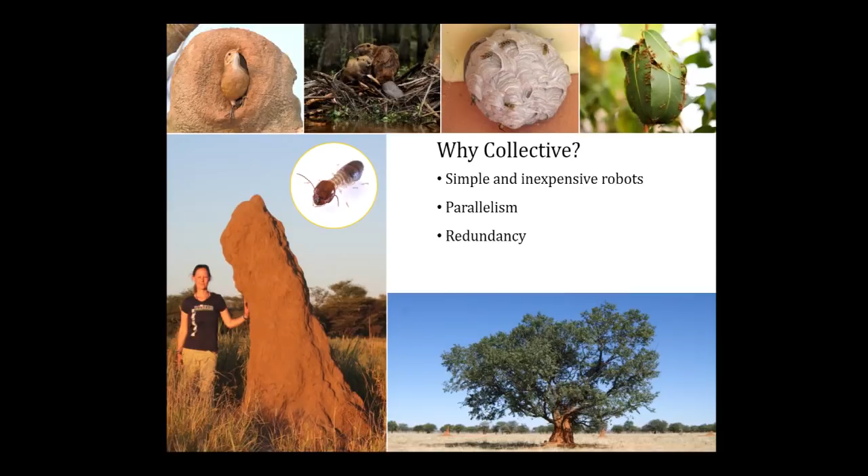So it's my dream to eventually create robot collectives that might work just as well under internal and external perturbations. To do that, we really need to focus on very simple, very robust, and very scalable hardware. So I'm a strong proponent of embodied intelligence, which is a means by which we optimize the hardware specifically for the task at hand in order to limit the need for complicated sensors and control.

If you think of a termite, it's very vulnerable on its own, has a soft, squishy body. It's a delicious treat for many other insects. It's completely blind. But as long as you place that termite as part of the collective and into the environment it's constructing for itself, it's remarkably robust.

So it's that sort of approach I like to take to robot collectives, and it's the reason why I really like this concept of automated construction, where we get to design not only the robots, but also the environment, the structure, and the building material that the robot operates in. So we get to optimize the two for each other and thereby create even simpler hardware.

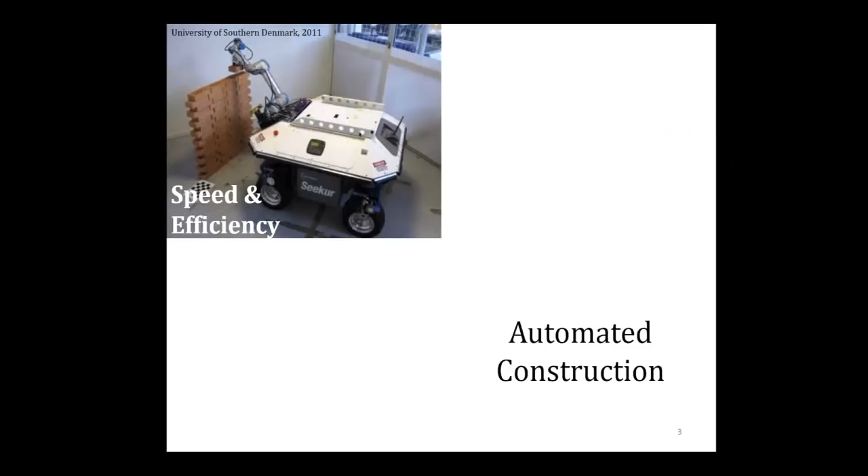Other than being a really good task with which to study robot collectives, automated construction also has the ability to improve speed and efficiency in construction, and even more so, to remove humans from hazardous environments. In 2014, more than 19 percent of all work-related injuries reported in the US were due to construction workers. On average, 2 people a day are fatally injured on US construction sites. That's a pretty sizable number.

I'm interested in enabling construction in settings that have been considered too dangerous for humans to work, like disaster areas, where you can imagine robots coming in to build supporting structures in the rubble, or extraterrestrial areas where you can imagine robots building temporary scaffolds within which humans can work safely later on.

Now, lots of people are working on robot collectives. I found a couple of cool examples here at UW. This here is work from Eric Klavins' lab with these robotic chemistry-inspired testbeds.

This is really cool work for 2D assembly, but these robots sort of lack the ability to interact with and modify the environment in the way that I'm looking for in my research.

These here are more along the lines of what I do. These are the swarm bots from EPFL. Every robot here has the ability to sense, think, and move on its own, and they have this little gripper with which to grab onto other robots if they want to reinforce or encounter a bigger obstacle.

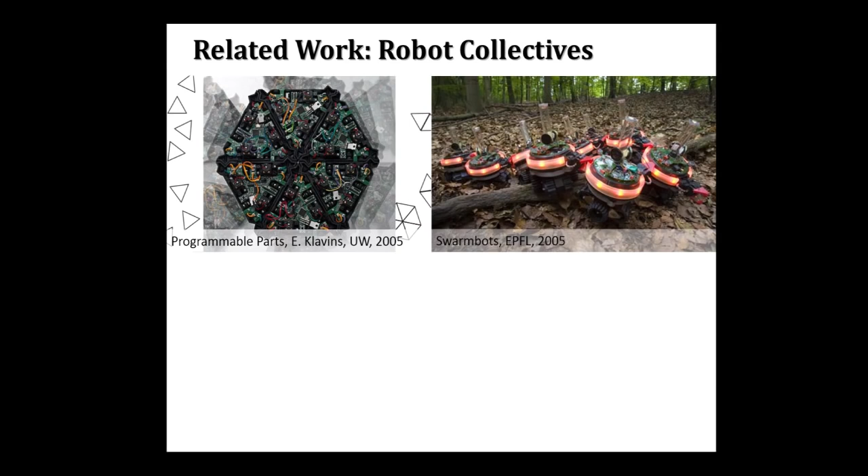Typically, hardware like this has issues, right? It's rather complicated, it's prone to error, it's pretty expensive, and so you don't have very scalable systems. Up until 2014, no systems had really made it beyond a few tens of robots applied to very simple demonstrations.

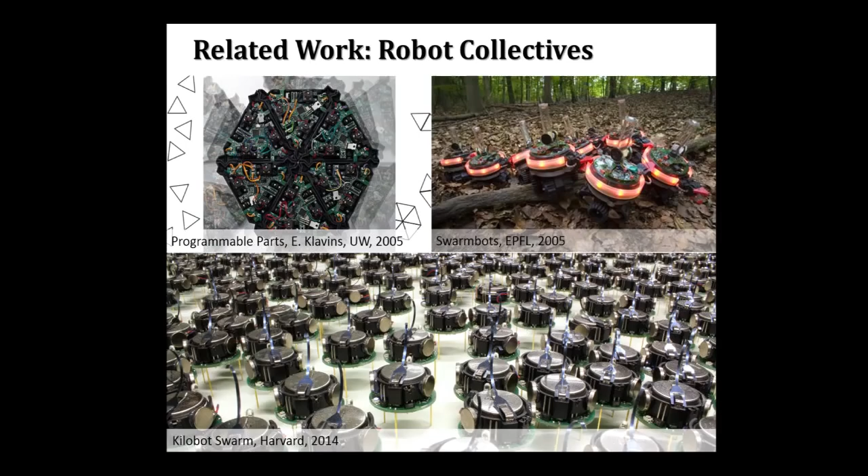Then in 2014, Mike Rubenstein from my old lab came out with his work on the swarm. This is a kilobot swarm. There are 1,024 robots. Again, every robot has the ability to sense, think, and move on its own, and they can communicate locally.

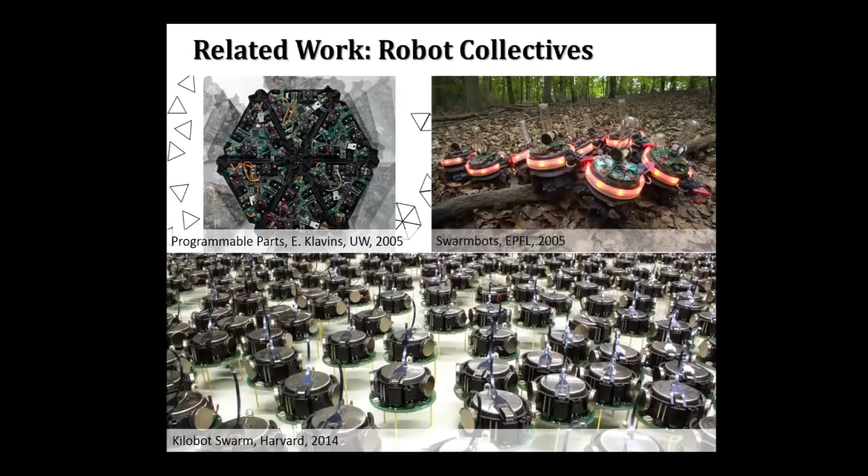This is really cool hardware, because it suddenly allows us to test all of our swarm intelligence, all of our swarm algorithms out on real hardware with real implementation issues. But again, notice how they're only working on a perfectly smooth whiteboard setting in a highly controlled laboratory environment.

And don't be fooled by this picture, these are 2D. So there's still a pretty big gap from where we are today to a final system that might actually work in a cluttered environment.

If we look at collective construction, it gets a bit more complicated, because here we're looking for robots that can not only manipulate material, typically on the scale of the robot, but also maneuver on top of that material too. Those two challenges, climbing and manipulation, are individually complicated, and putting them together in practice is proving quite hard.

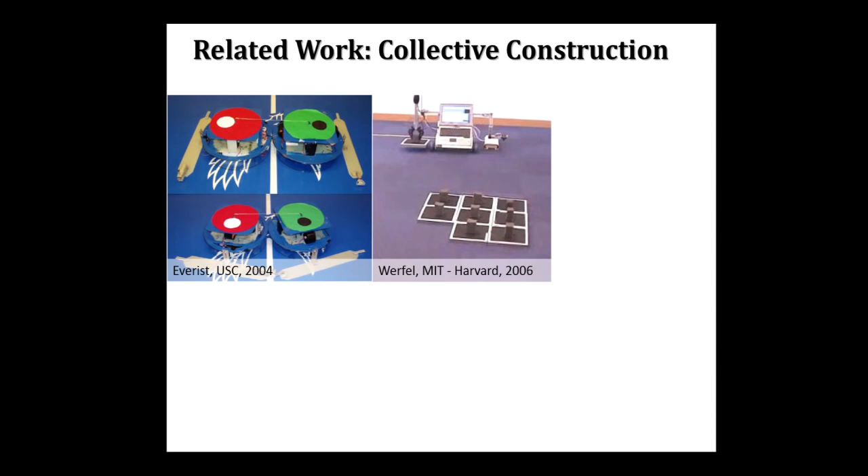There are many examples in 2 dimensions. Here's just a few: robots docking trusses on an air hockey table, done at USC. This here is work by an old colleague, Justin Werfel, where he had these very simple robots placing bricks in predefined patterns. Much less work has translated to 3 dimensions.

Again, just a few examples. These are really the pioneers of the field, Terada and Murata, who had these simple arms moving passive bricks around in a structure. And this here is work I did at the University of Southern Denmark in my master's thesis, where I had smart but passive bricks guide active but dumb robots on how to build a structure.

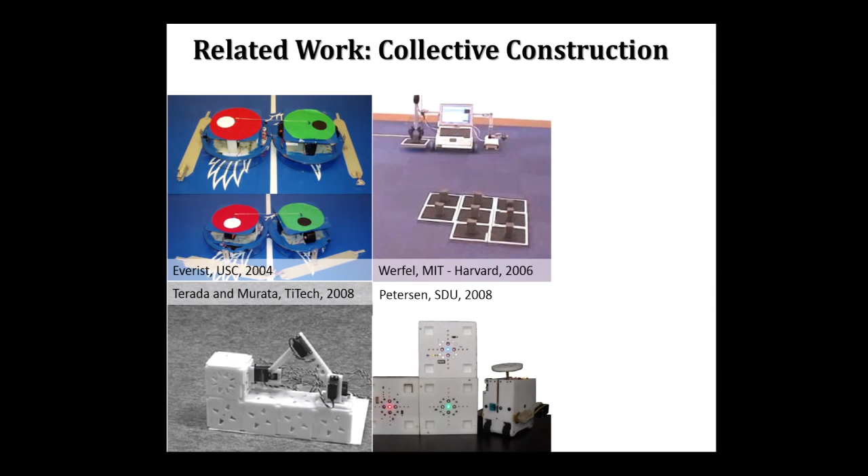So again, really cool examples of which way we're going, but there's kind of a lack of proper implementation, right? Still very advanced hardware, it's too expensive, it's prone to error. You never see more than 1 or 2 robots working together at any one time, and the structures they're creating are pretty small compared to the size of the robots.

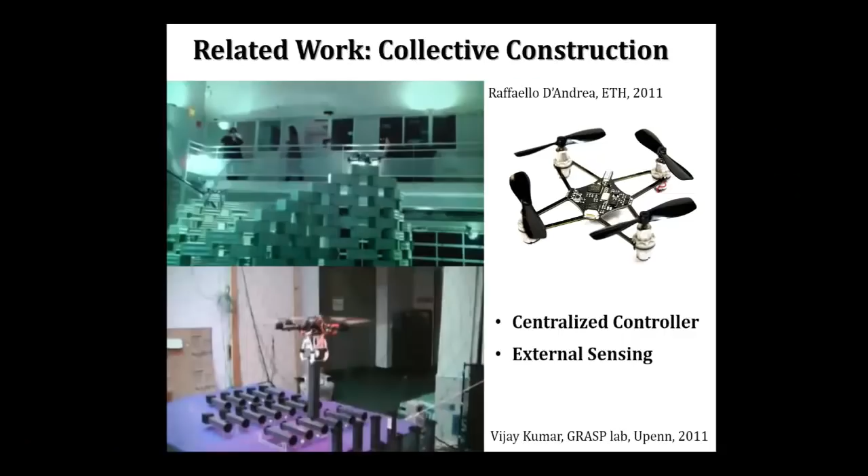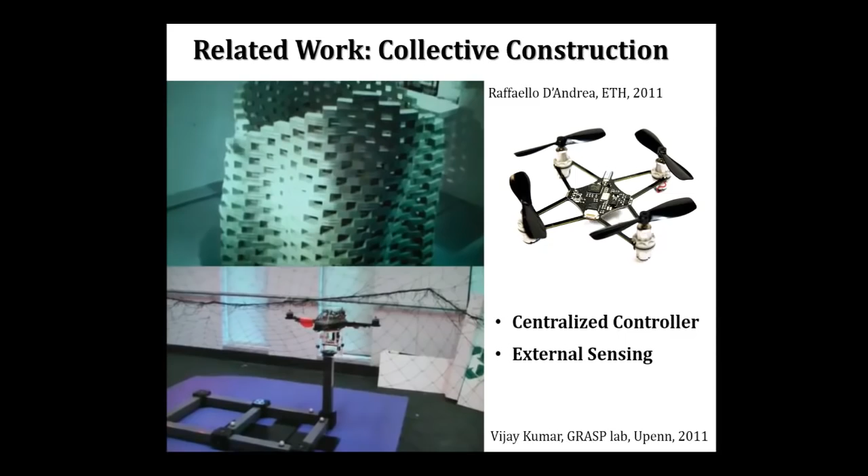So there are a couple of exceptions. The most notable is the work with quadrotors, both at ETH and UPenn. Let me just point out here that these work with a centralized controller, and they have external sensing, basically a Vicon system that tells them exactly where all the material and all the robots are at all times. So a very different approach to the problem than what I'm going to be presenting for you today.

Now, where there's been relatively little work in hardware, there's been quite a lot of work in algorithms, from gradient descent algorithms for how to efficiently guide workload around on a truss structure, to work in weightless and semi-weightless environments with homogeneous and heterogeneous societies.

And these are really great, right? Because they show us that we can achieve a wide range of structures with these multi-agent systems, ranging from systems that have completely centralized control or lots of communication between agents, to systems that have completely decentralized control or no communication between agents. Again, unfortunately, common for all of them is that they tend to underestimate how hard it is in real life to actually make hardware that works reliably doing all of these rather complicated tasks.

So in summary, we have these two bodies of literature that sparsely overlap. There's a pretty big gap between the abstract agents and what's physically realizable, especially in this type of cluttered construction environment where communication is likely to be unreliable, where any memory you have of the structure you're building is likely to be outdated very fast because a lot of robots are updating the same structure at once.

Finally, we need to focus much more on simple, more robust, more scalable hardware, and that really hasn't been done in the past. Also, I think it's important that we focus not just on making systems that are free of error—it's pretty much impossible to do. I think it's important that we focus on making systems that can tolerate errors that are bound to happen, perceive them, and recover from them before they become a problem to the bigger collective.

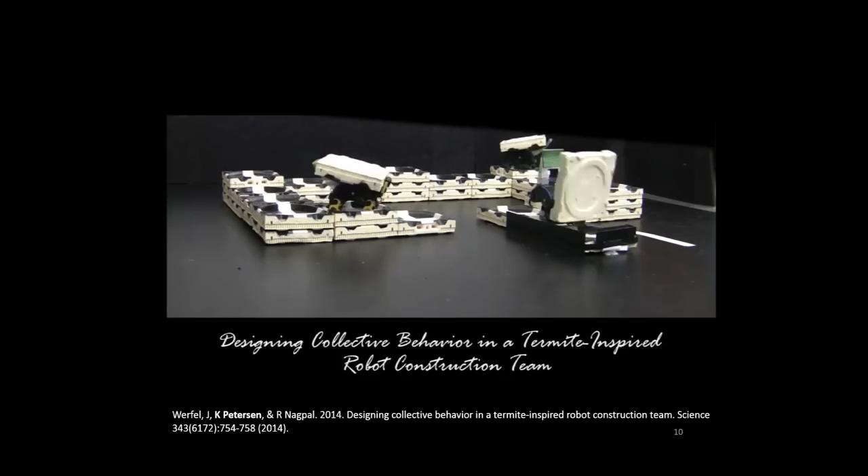So we made this algorithmic framework and a full physical implementation of these systems for collective construction of user-specified three-dimensional structures.

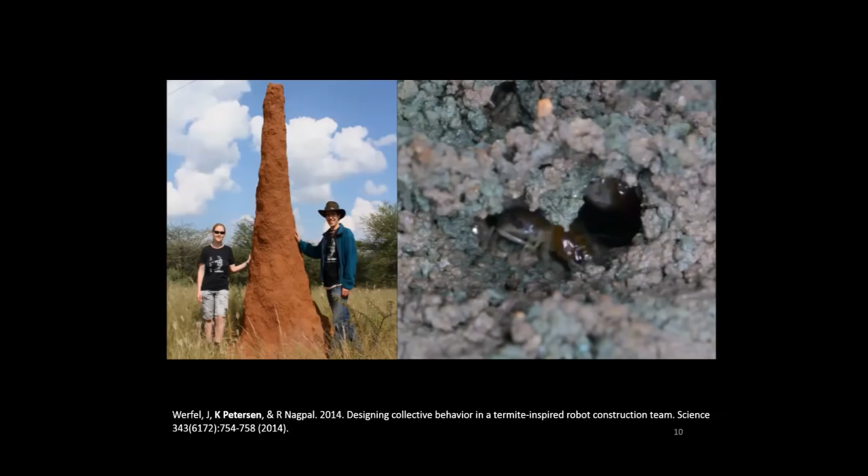Our work was inspired by these African species of termites, millions of which come together to build these amazing mounds out of soil. The termites are able to achieve a high degree of parallelism by passing information through the environment.

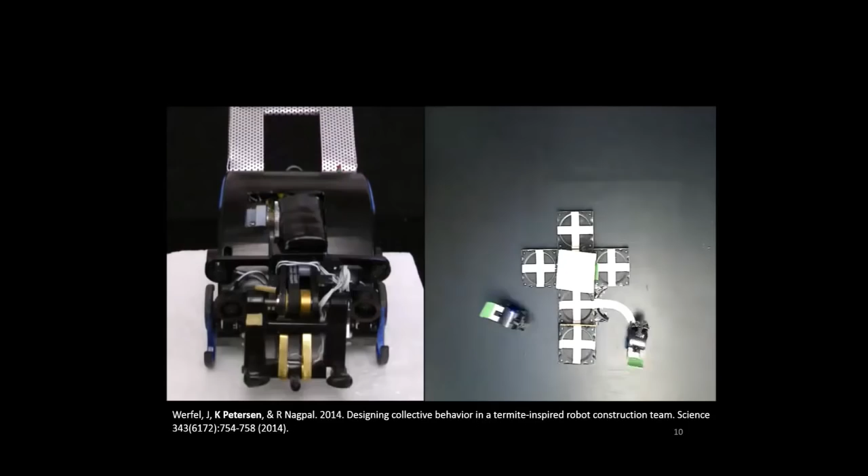Now, like the termites, our robots work in a completely decentralized fashion. They have to climb on the structure they're creating. They can only sense their local environments. But through the strong focus on error-tolerant control and co-design, embodied intelligence, we were able to achieve a very reliable system.

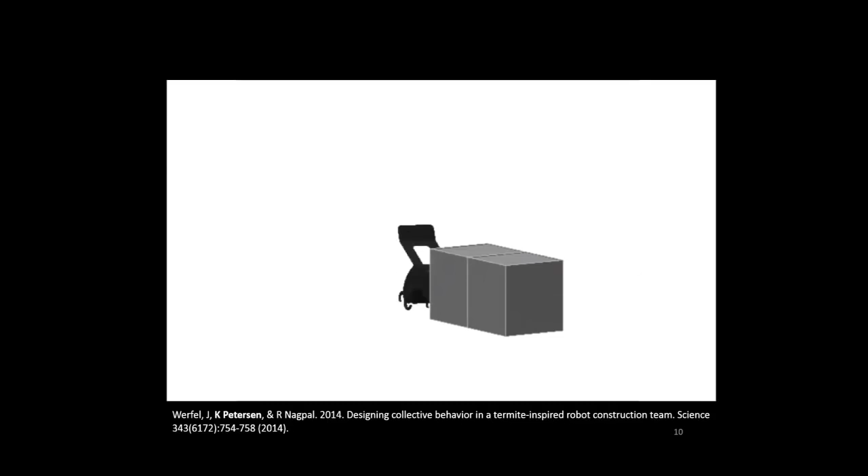So it works by taking this blueprint of the structure, some user input, passing it through an offline compiling step to generate a set of traffic patterns, which we then give to an arbitrary number of robots. The robots then use that set of traffic patterns along with an internal rule set, which is independent of the structure they're creating, to create these user-specified structures with provable guarantees.

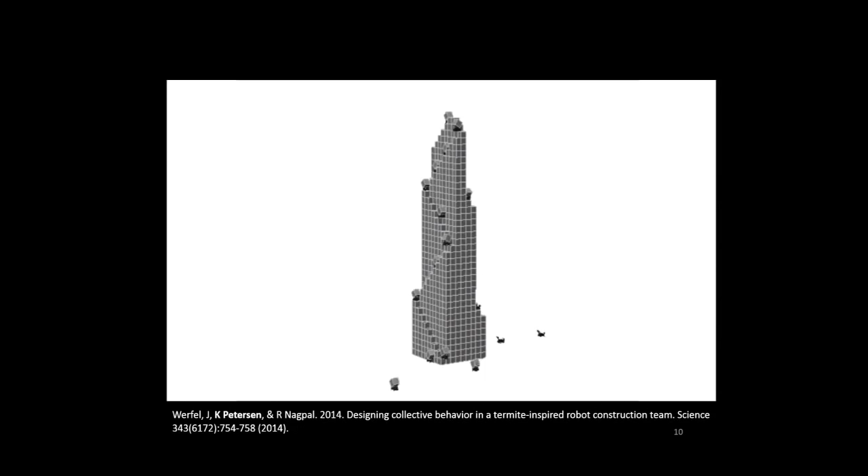Now, robots can utilize many different paths through the structure, meaning the structure can emerge in many different ways, but always with this final fixed outcome.

And the cool thing about the algorithms is really that robots have no memory of the structure they're building, so I can come in and interfere with the progress of the robot, and it doesn't care. It simply keeps patrolling the structure, doing what it needs doing whenever it sees something is wrong. And this could be me or another robot, it doesn't matter.

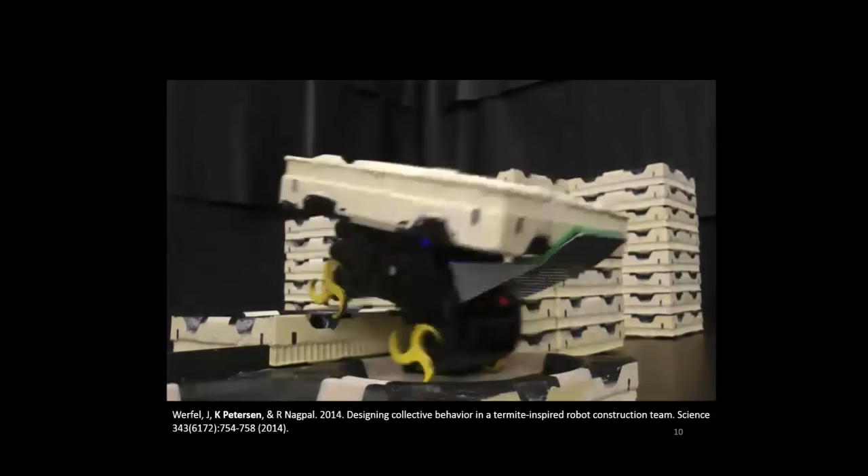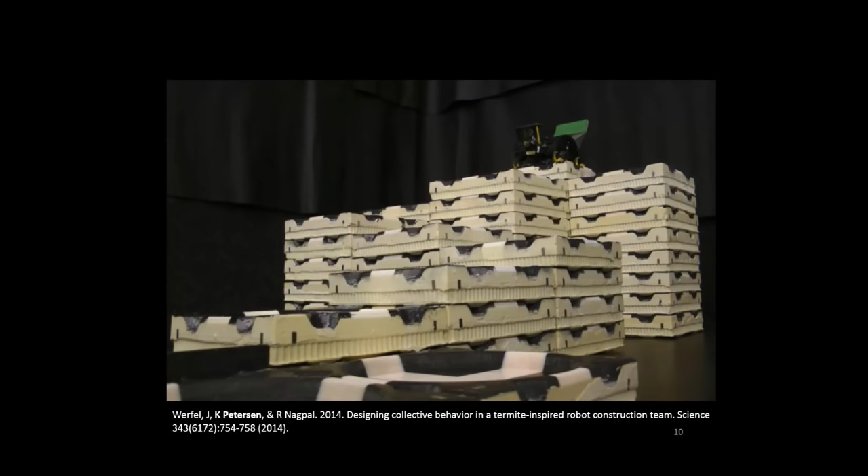So with this work, we hope to have shown how we can achieve rather complicated behaviors with very simple, independent, self-contained robots. And of course, the idea is you build on that in the future to achieve even more complicated things. All right, so I promised to tell you how this works—the framework first.

So for that, we have to go back to the termites. As I said, you have millions of them in nests underneath these big mounds. And the mounds are much more than just a pile of dirt. They're an intricate series of channels and chambers that we actually have found work as an artificial lung for the nest site underneath. It's a highly complicated structure. The termites, as I said, work in a decentralized fashion.

They're able to achieve this high degree of parallelism by passing information through the environment in a process called stigmergy. They're relatively simple compared to the structure they're creating. They have to climb on it. They certainly don't have the mental capacity to perceive the state of the entire colony. They're localized, meaning they're, in fact, completely blind, so they have to only sense their local environment. And although the system may look messy at times, it is remarkably robust and error tolerant.

And through their low-level inputs, they're always able to produce these guaranteed high-level outcomes. So we've taken these ideas and implemented them into a bare minimum robotic system that can still achieve a wide range of structures. What I'm going to show you today is an algorithm that can build user-specified three-dimensional structures with many agents, as long as those agents comply with a set of fairly simple constraints.

We need robots to be able to perceive locally, meaning the brick at which they're standing and if other robots are nearby. They need to be able to perform limited brick manipulation, meaning they should be able to place a brick directly in front of themselves and never directly in between two other bricks, because that would be hard to achieve. They should be able to add bricks to the structure but not remove them. They should be able to climb up one brick at a time but not up straight walls. And they should be able to avoid other robots but not have to communicate with them.

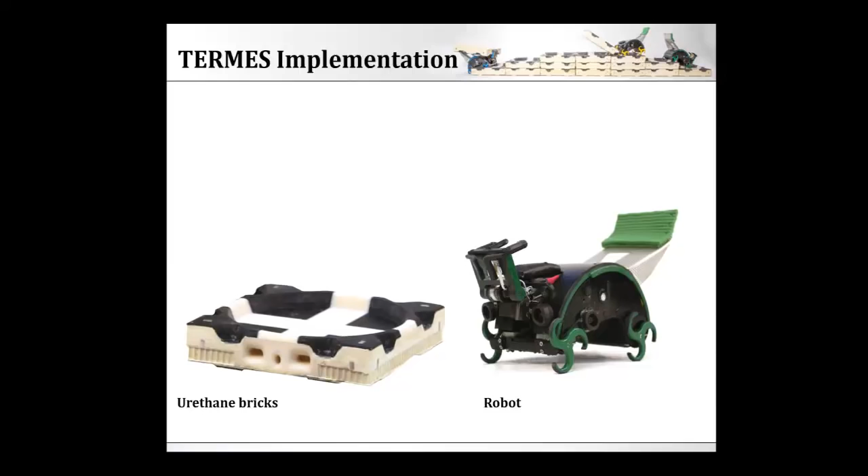So here are the robots I designed to go along with that system, robots and bricks. The bricks are made of urethane, which is a light, cheap, sturdy material. They're about the size of a normal brick, and they weigh about a quarter of the robot. The robot is slightly smaller than a brick, so it fits on top of a one-brick wide wall.

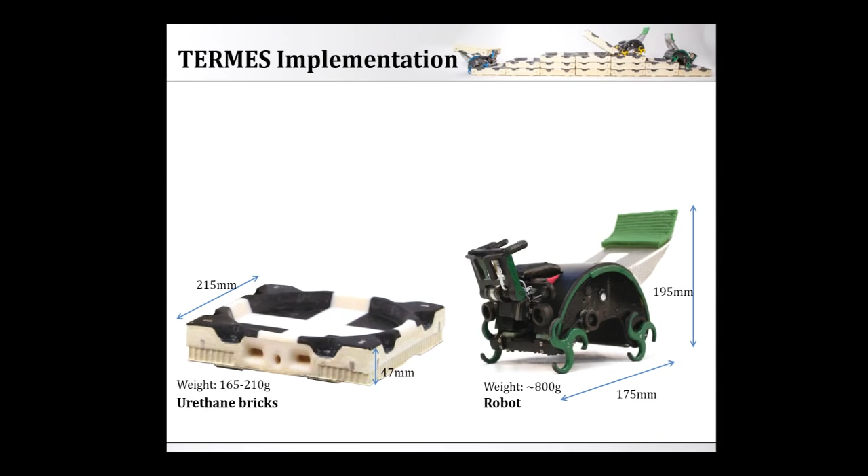And when I designed these things, I really had a strong focus on simplicity, robustness, and reliability through two key features. The first is co-design, meaning that for every new challenge, you take a step back and ask where can we solve that challenge in the simplest possible way? By changing the hardware of the robots, by adding sensors, by changing the shape of the bricks, the structure, the embedded hardware or the software or even the governing algorithms. Nothing is off limits, and that really allowed me to make a very simple system.

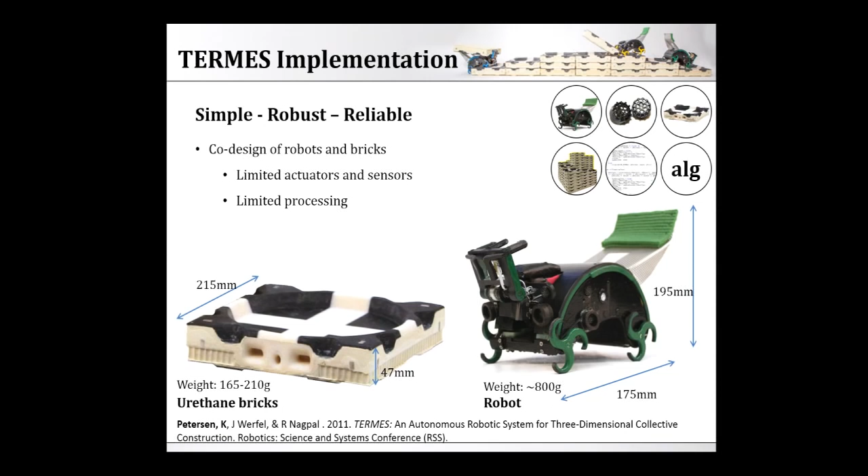In this case, the robot has 3 actuators and 4 types of very simple sensors, and all of the processing is done by simple finite state machines. As I said before, I wasn't focusing here on making a robot that never committed errors. I knew they were going to happen. I focused on making a robot that could continuously evaluate its own process and fix any errors that were bound to happen.

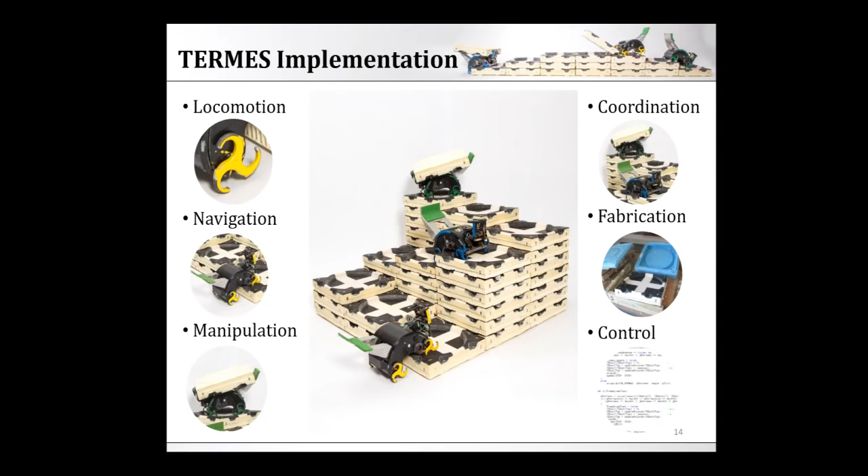So here are the challenges we took on when we designed the system: locomotion, navigation, manipulation, coordination, fabrication, and control. I'll just briefly touch on each of them. The first big challenge was that of locomotion, both on level ground and climbing with simple control.

So as you can see, we focused our efforts on Whegs. Whegs are a combination of wheels and legs, a term coined by Roger Quinn at Case Western. They're really great for fast locomotion over unstructured environments with very simple control, which is kind of what we're trying to achieve too. We want robots that can climb very tall bricks, because the taller a robot can climb, the more material you can add every time, and so the faster you can complete a structure of a given size.

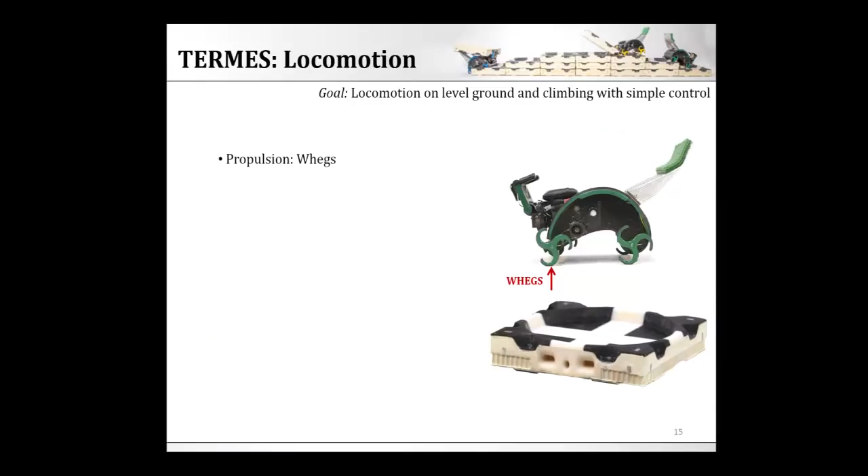We want more than just easy control. We also want very accurate control when the robot is walking on top of a structure, so to avoid falling off that structure. To do that, I added these passive mechanical features in the bricks to help the robots. I added notches on the side of the brick that are chamfered inward, so as the robot is climbing it automatically aligns. There are little hooks on the rear Whegs that help the robot gain traction just at the right time.

Whegs are great for climbing, but they're pretty poor for turning because the radius of the Wheg changes over the turn of a rotation. So to improve that, we curved the spokes of the Whegs. I added this indentation bowl, so now, unless the robot is actively trying to climb out, it will stay in that bowl and keep turning.

Very simple features. Because we had all these indented features on the top, we added inverted features on the bottom and magnets that help them stack and align, almost like Legos. A rather complicated challenge solved in a very simple way by optimizing all parts of the system for each other.

Not to go into too much detail on the hardware, but this is a differentially steered robot. There's a little motor that sits down here that drives the front and rear wheels through a timing belt. There are a bunch of considerations behind how to optimally place the center of mass so it can climb up and down bricks while carrying and not carrying a brick.

The next big challenge is navigation, both on the structure, where the robot has to keep track of its location with respect to the seed configuration placed down here. To do that, I added visual markers on the bricks, these black and white patterns.

Six IR sensors underneath the robot, imagine a very coarse black and white six-pixel camera. Together, these are enough to perform accurate pattern recognition as you walk across the structure. I also added a one-axis accelerometer so the robots know if they're climbing or not, so they can recognize the structure they're moving over.

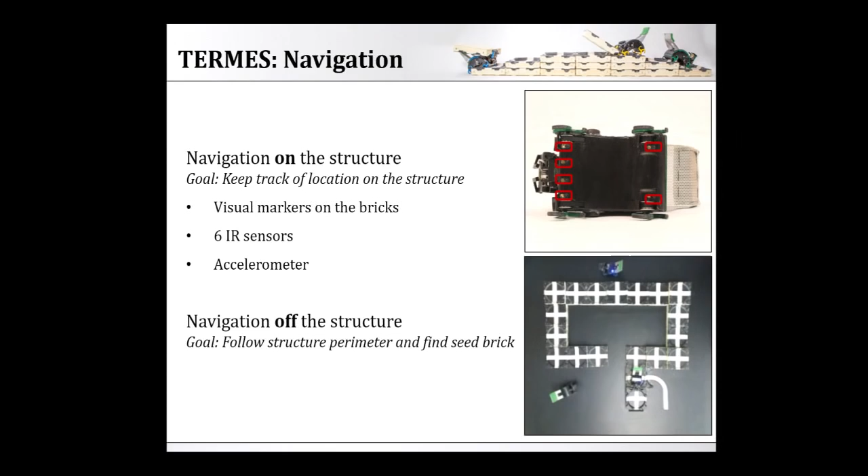We also need robots to navigate off the structure, and the goal is to follow the perimeter back around until they find the seed brick again. I added four ultrasound transceivers in the front and side of the robot so it can do wall following.

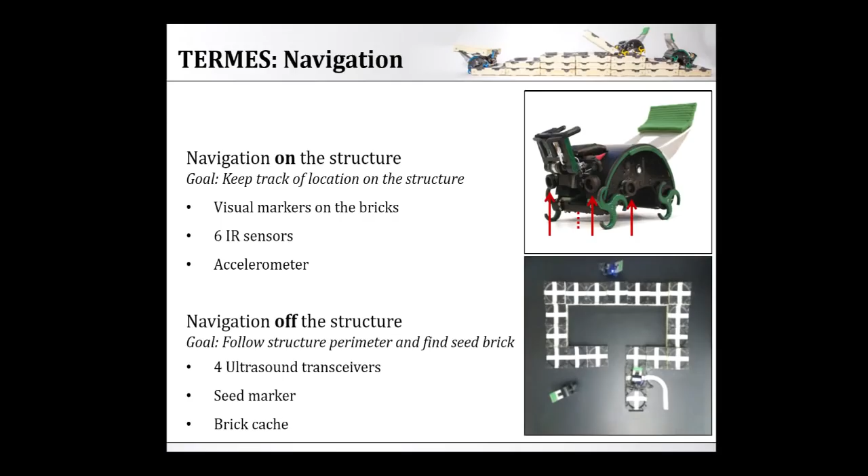I added a seed marker, a white line on a black floor. Rather than having robots go off into unmarked territory to find new material, which has caused trouble in past projects, I just added a brick cache at the beginning of the structure. Now all robots have to do is navigate relative to the structure, making them much simpler than they would have been otherwise. Again, a complicated challenge solved in a very simple way.

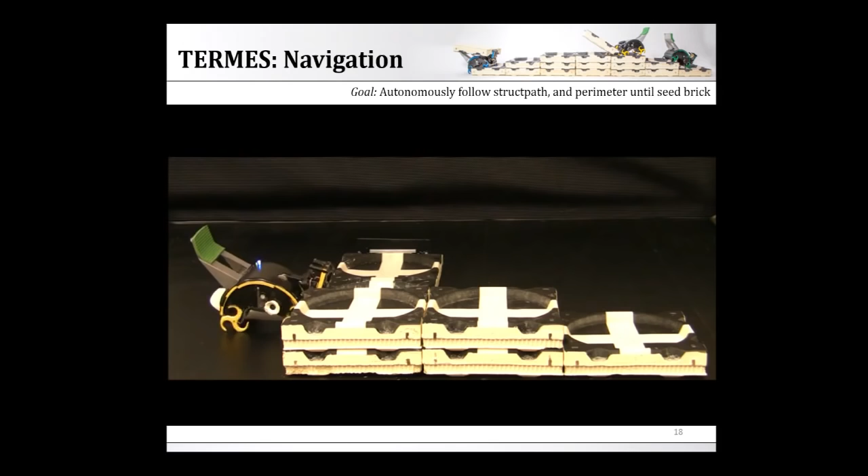Here you see this robot performing wall following, not perfectly, but through this iterative process it eventually gets the job done. At some point the robot picks up the white line on the floor and starts following it with the IR sensors. When the accelerometer detects that the robot is climbing, it knows it's on its way up that first seed brick, and it starts following the path I've given it through the structure.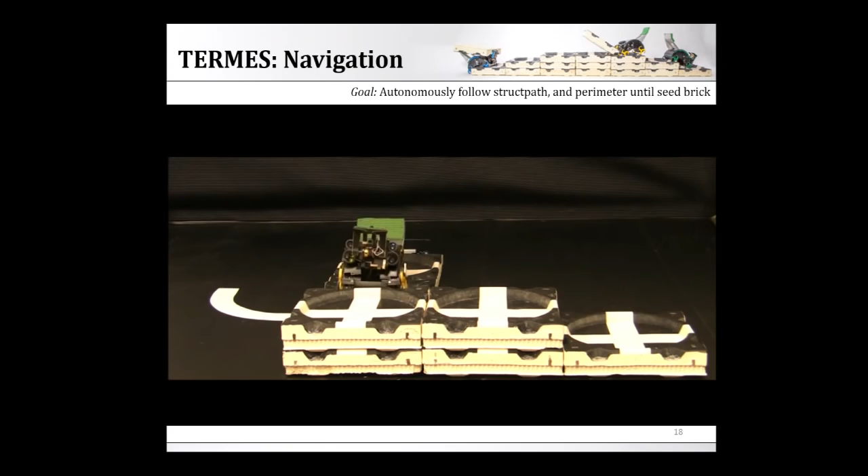Notice how the robot's definitely not perfect—it slips while climbing, it misaligns, it almost fell off the structure here—but it's continuously reevaluating itself and fixing all these small problems before they become bigger problems. So it's very reliable in the end.

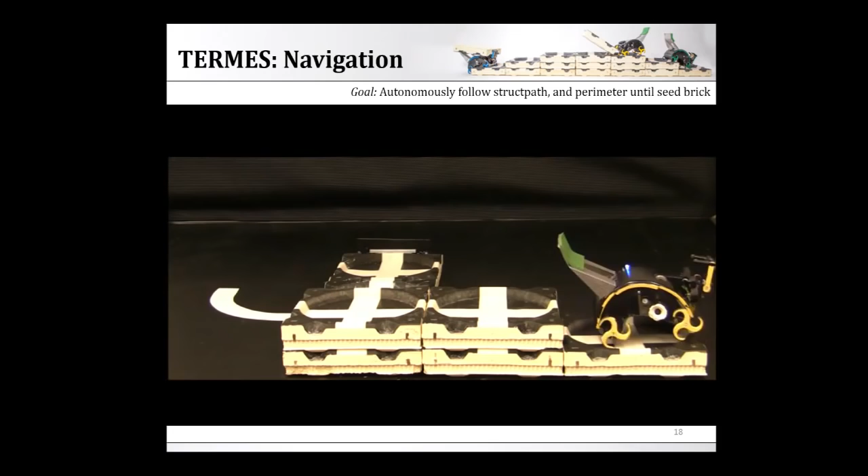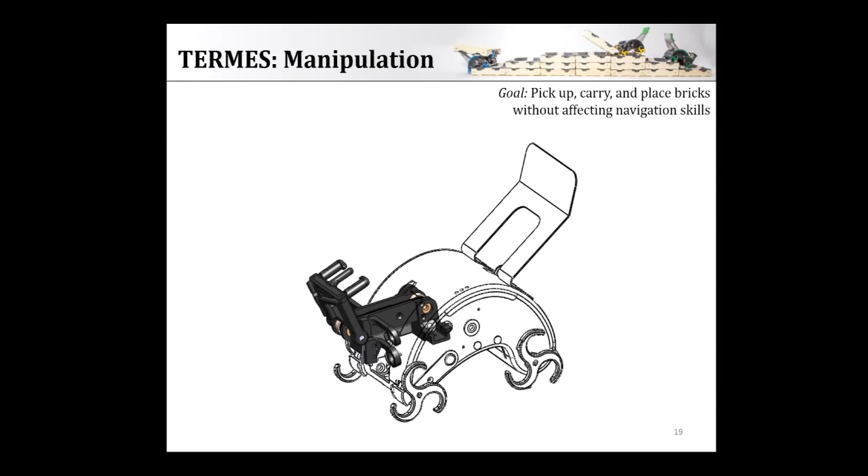We also need manipulation. For that, I added this fixed arm that always protrudes from the robot. There's a little motor down here that can drive this claw up and down. On the tip of the claw there are three prongs: the center prong is fixed for stability, but the two outer prongs are forced inwards by torsion springs.

I can force them open by pressing on the back, or I can lower the entire claw, and this wall down here will automatically force them open for me. That means it's really easy to release or grasp a brick, but as soon as I bring the claw back up, they snap back into place and hold the brick securely.

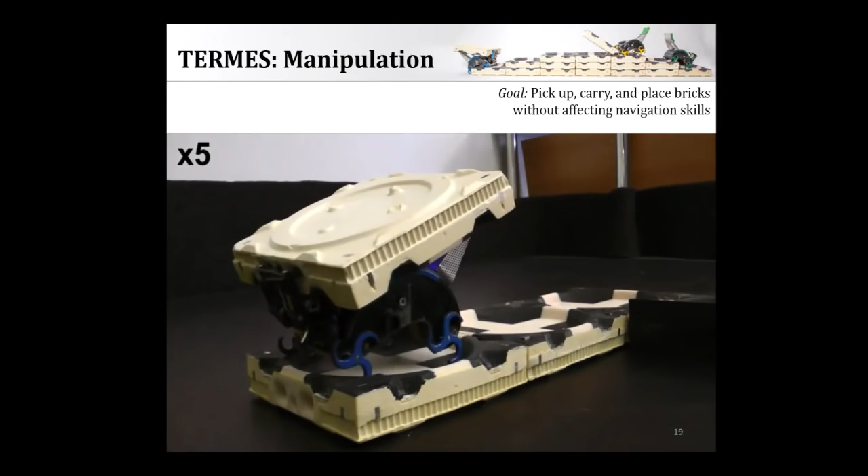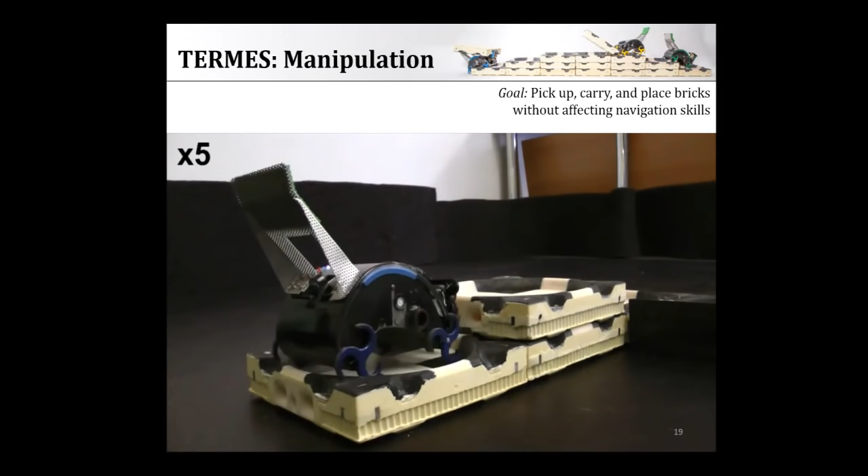I filleted the handle of the brick to make it really easy for the robot to dock with, and I added tactile sensing in the front of the claw—push buttons—to let the robot know if it has a brick in possession or not. Again, a complicated challenge solved in a very simple way through this focus on embodied intelligence. All the robot has to do is lower and raise the claw, and the rest happens automatically in hardware.

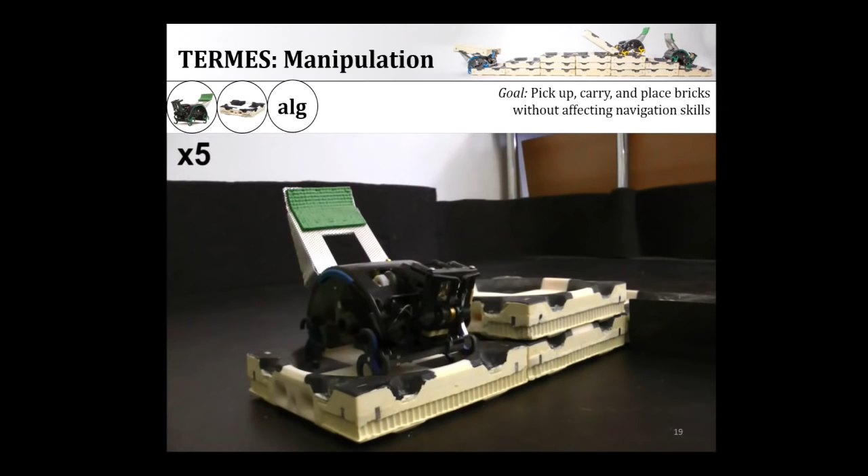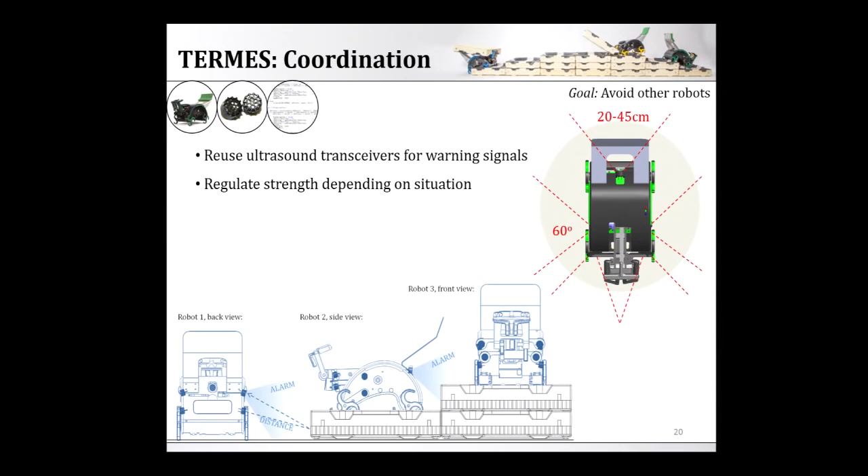All right, we need many robots to work on the same structure at once. They don't have to work together in this case, they just have to avoid each other. I send out a low amplitude ultrasound signal for that to happen, so another robot that sees that basically stays put until it's gone. I regulate the strength of that warning signal depending on the situation. So for instance, a robot which is about to place a brick needs a bigger safety perimeter than one that's just circling the structure.

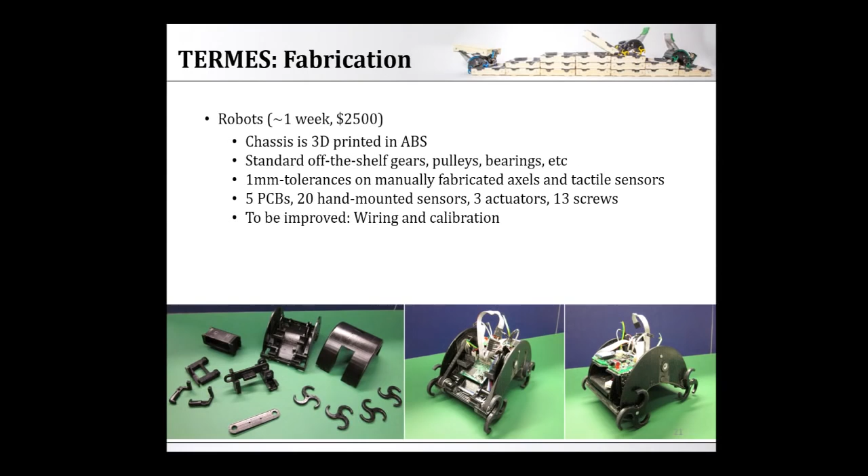Not to go into too much detail on fabrication, but I do want to point it out because it's incredibly important in this kind of iterative process where you're continuously updating both software and hardware at the same time. So right now I can redo a robot in about a week. That's from starting the 3D printer to ending calibration of all the sensors. Not a pleasant week, but I can do it. Right now it's pretty expensive, but that's because we're 3D printing the entire chassis. This you could optimize in the future if you wanted to.

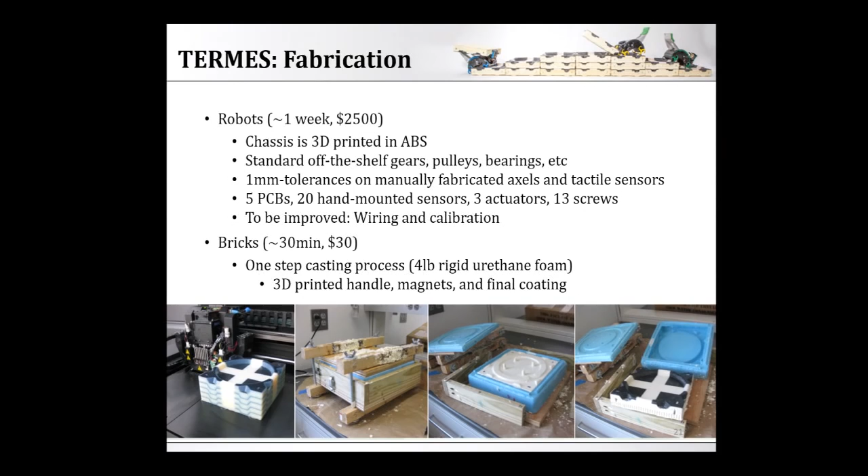Bricks are actually done in this very nice one-step casting process that I'm happy to talk more about later on, but you can do those very, very fast. And I guess I'm bringing up this slide because I want to say during my thesis I had to do 80 bricks and 9 different robots, and so it was very important to have this strong focus on very easy fabrication.

All right. Final piece of the puzzle is the embedded software that goes on those robots. And of course, the goal here is to enable the robots to autonomously build structures with high reliability, but it's also to create a software architecture where you can easily swap in and out different subroutines as the hardware is updated. So I created this hierarchical software architecture that has an algorithmic layer that runs sequentially, a behavioral layer that runs on inputs from either other layer, and a hardware interface layer that runs on interrupts from sensors or timers.

So the algorithmic layer obviously holds the algorithms and some higher level subroutines. The behavioral layer holds the more intricate subroutines like align on top of a brick or turn on top of a brick. And then all of these make use of these hardware interface routines that directly set the speed of the actuators or read in from sensors and so on.

So of course, it's important to remember that behind each of these settings, there's a longer set of code that ensures that each of these tasks is executed reliably before the next commences. But this really was a nice, clean software architecture. I could easily switch out different routines. I could even translate them between the different levels.

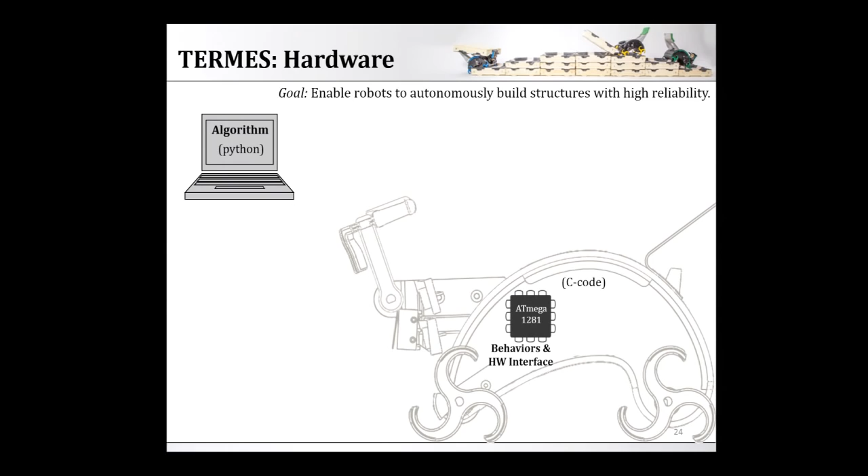And in the end, I actually ended up doing the algorithm on a separate computer that was written in Python, just for ease of debugging. I had the 2 lower level behaviors on an Atmega 1281 that was written in C. Those 2 communicate via Bluetooth. And then I have a separate processor taking care of all the ultrasound related circuitry just because it was rather time consuming.

All right. So here you see all parts of that system working together. In this case, I asked the robot to build me this little 10-brick staircase, which is more than 18 times the volume of the robot. That means carrying out 106 instructions correctly in a row.

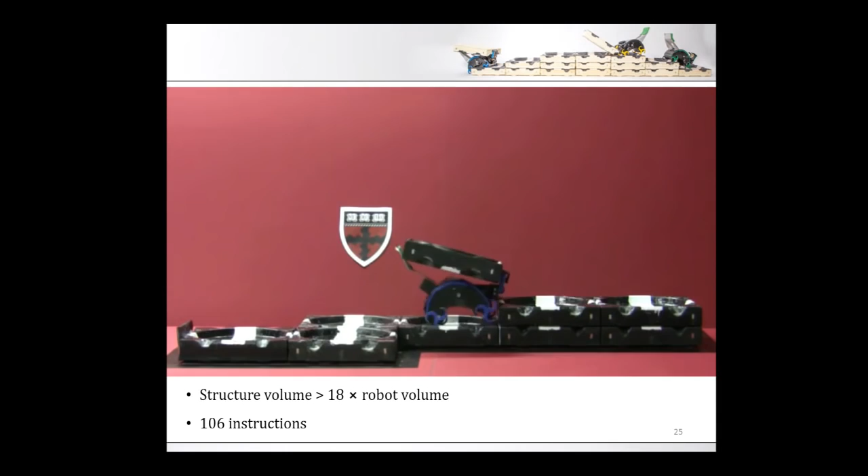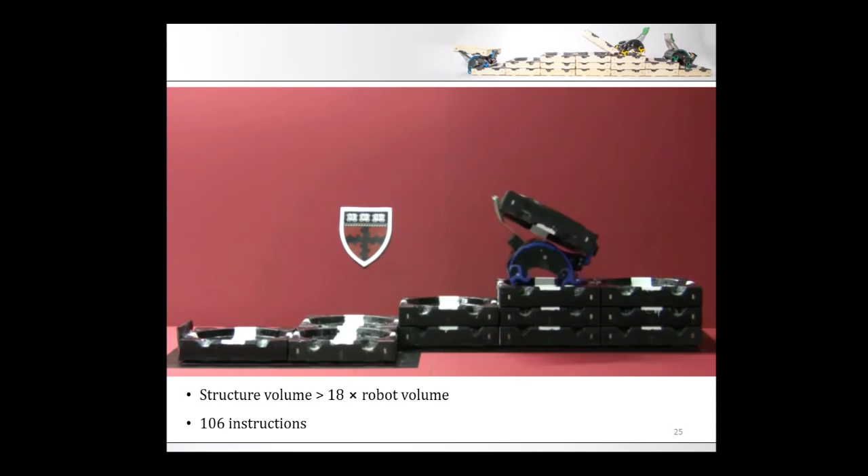So an instruction can be something like move from one brick to the next, or turn on top of a brick, or pick up a brick, or place a brick. So again, very clear that we have to have a very strong focus on error-tolerant control and very robust, reliable hardware.

All right. So I promised to tell you about the algorithms. Again, a high-level overview. We take the user input, which is a blueprint of the structure. We pass it through this offline compiler step to generate a set of traffic patterns. We call the output of that struct path compiler a struct path. It's basically a 2D projection of the structure that you want to create with a number at each site specifying the height of the stack of bricks at that site, and an arrow at each edge specifying which way robots can travel through the structure.

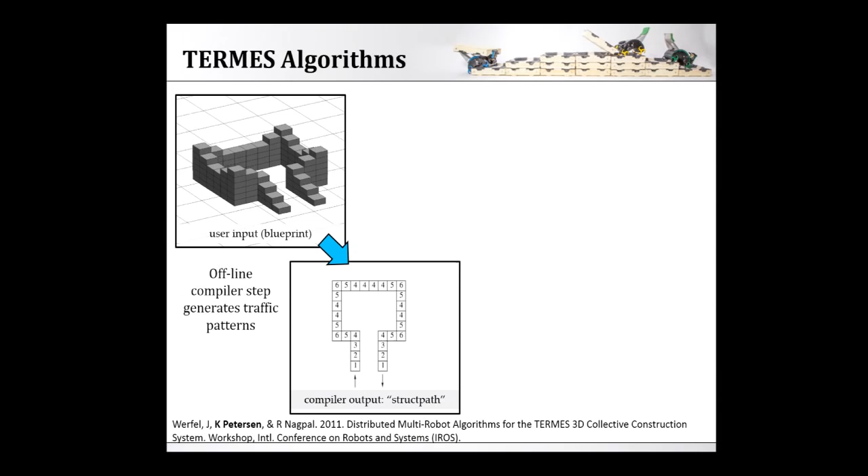Then we give that struct path to an arbitrary number of robots along with an internal rule set, and we allow them to perform decentralized construction. So if we take a step back, there are 2 key features to this algorithm. The first is this struct path compiler, which you can give any new structure, and it will automatically tell you whether or not that structure is doable. And if it's doable, it'll give you some traffic pattern that guides the flow of robots over the structure. And then there's this internal rule set, which is independent of the structure and just tied to the mechanical abilities of the robots.

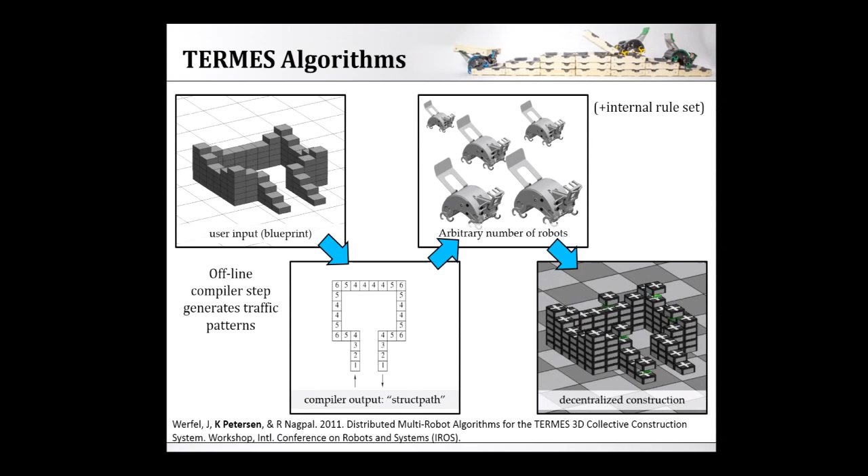Together these two guide the robots over the structure and organize their building activity so that the local information available to the robots is enough to guarantee completion of the correct structure. Without those, you might end up in bad situations where something created a cliff that other robots couldn't climb over, or created a gap in the structure that you'll have to fill in later, which will be hard. We don't allow either of those to happen.

But as I said, we also need this agent rule set to ensure everything is done correctly. A simple example first: this is for a linear path structure. The robots will get a brick, go to and follow the struct path. If the struct path specified a brick at the site they just visited—remember robots can only see the brick they're standing on, so they have to pass over the site they're inspecting before deciding to turn around and place a brick—and it's safe to attach that brick, then they add it. If at any point they see another robot, they maintain their distance.

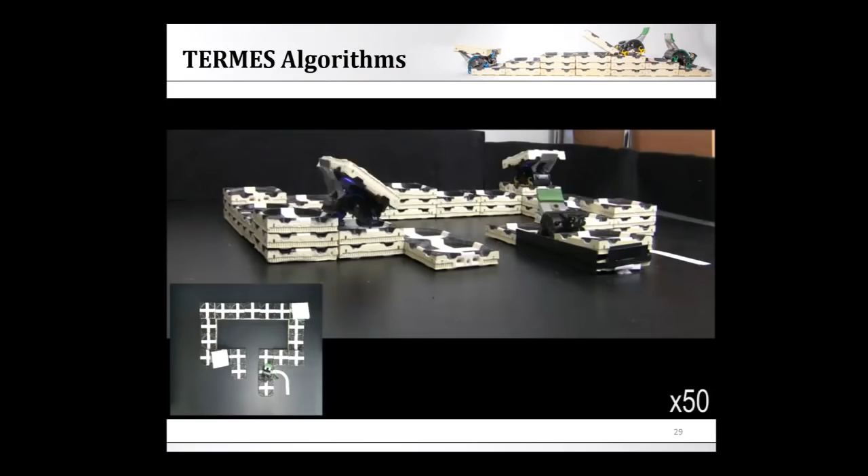So we can do a wide range of structures with this system: linear, branching, solid structures. Of course, there are some limitations. We can't do overhangs, we can't do narrow corridors. There has to be an entry and at least one exit point on the exterior boundary of the structure, and there has to be a traversable path for the structure.

But I can show you some pretty cool simulations where we have a lot of robots building a lot of different structures—in this case, a very tall tower. Again, we're specifying the high-level output through these low-level rules. This is a system that doesn't need an overhead controller to work. We don't need robots to maintain global awareness or even be synchronized. Every robot is easy to add and remove from the system.

Completely decentralized control in this case, and highly simple agents that are actually physically realizable. If you paid attention, you'll notice I was still telling you about perfect agents, and in the beginning of my talk I told you that's not possible. Yes, that's true—we allowed ourselves to do this in this first version of the system because I managed to produce such a reliable set of hardware. But in the future, you would definitely want to focus on more error tolerance at the algorithmic level as well.

Quick summary: I showed you the algorithmic framework with the compiler and the agent rule set. I showed you at most three robots and 50 bricks working at any one time. We had one robot autonomously build a structure 18 times the volume of the robot.

We've had 3 robots autonomously build structures 14 times the volume of 1 robot. We've done several performance tests showing that the number of failures the robots can't correct, compared to the number of successful instructions carried out, is very small. So we're happy with the system, but we're still not creating human-scale structures.

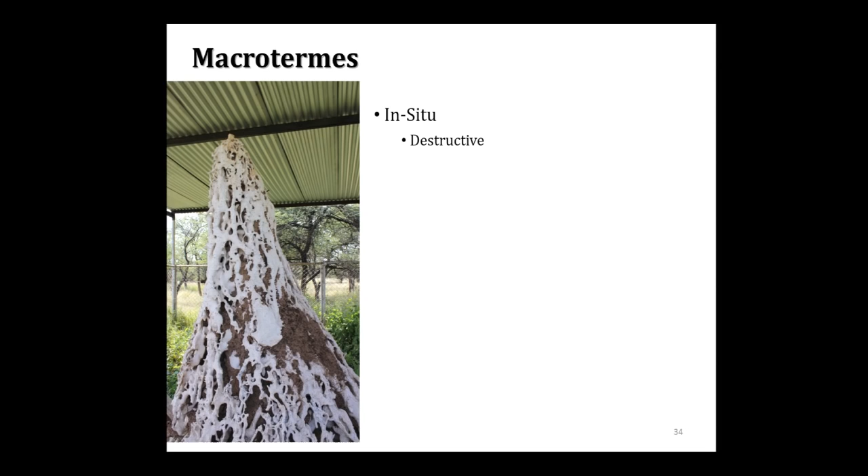What's more commonly done is you take termites out of the mound and place them into experimental petri dishes with soil to see what happens. This is problematic on its own, because termite behavior tends to deteriorate the longer they're away from the colony—lasting only a couple of hours or at most a day. But you can get them to construct some things.

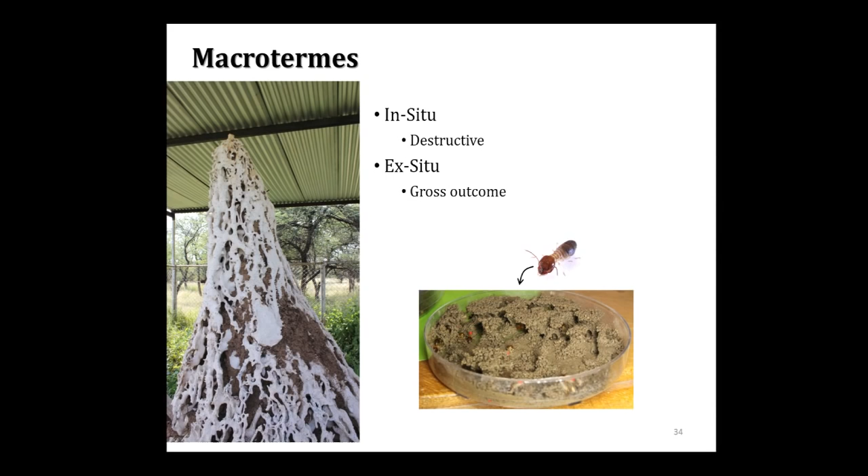Of the experiments directly interested in construction, only the gross outcome has been recorded—meaning you leave termites in there for a couple of hours, they build something, and you come back to see what they did. But you have no idea what the individual termite did or why it decided to do so.

Although there have been recent great advances in trackers for ants, bees, and wasps, they hadn't really made it to termites, because termites are so much harder to work with. So all the observations done are manual, which naturally leads to a very sparse data set.

I'm not an entomologist, disclaimer—but I figured with my background I could help by developing a toolkit that would allow more quantitative, high-resolution data sets than had been possible in the past.

So we did many things. Just to highlight a few projects—this here was work we did in situ. Basically we're cutting a slit in the mound and placing in an ant farm with 2 parallel glass plates, then observing what happens as the termites bring up soil from the nest to try to plug that hole. We can compare this alarm response between different colonies and also between different species, so it gets quite interesting.

We've also looked at building a 3D scanner directly in the field. We can observe how termites move soil around in these experimental arenas continuously over time.

I'm happy to talk more about these projects later, but really our main contribution was work I did together with undergraduate Erik Schluntz at Harvard—these semi-automated MATLAB trackers for tracking unmarked termites in recordings of experimental arenas.

The termites are unmarked, which is important because it saves us a lot of time having to mark them. And as I said, they don't like being away from their mound. Also, where normal trackers are interested in rather short-lived behavior like interactions, we're interested in very slow behavior: construction.

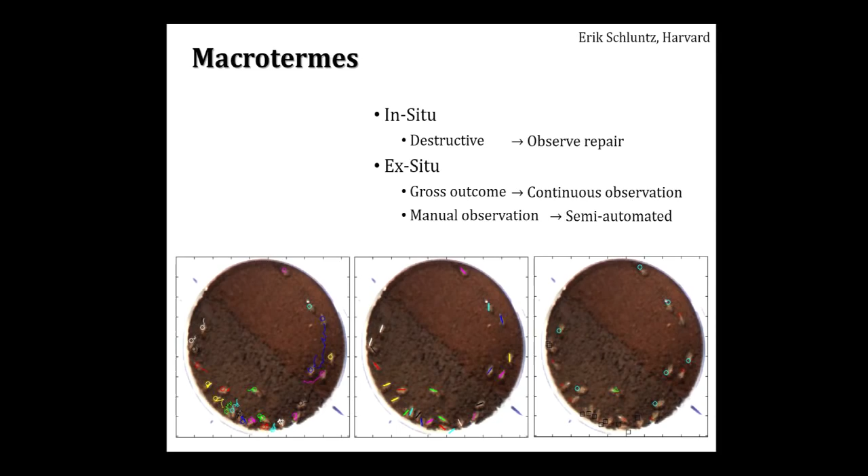I wish I could say we'd done more work with these trackers, but it's really very new work, and we've only done a couple of exploratory experiments. This is work I've done together with Paul Bardunias at Florida Atlantic University.

We've come across a couple of interesting research thrusts, but probably the most interesting is that we found indications of task allocation in termites, and this is something that's never been seen before. It's really cool because it's typically a big topic of discussion in swarm robotics, like how much efficiency can we gain by doing task allocation.

So this here is the same Petri dish, but 4 different termite paths in each of those Petri dishes. Most termites do this: they explore the arena, at some point they decide to dig, and then they start carrying soil just to the edge of excavation so they can get back in there and excavate more. But a few termites specifically pick up soil and carry it further.

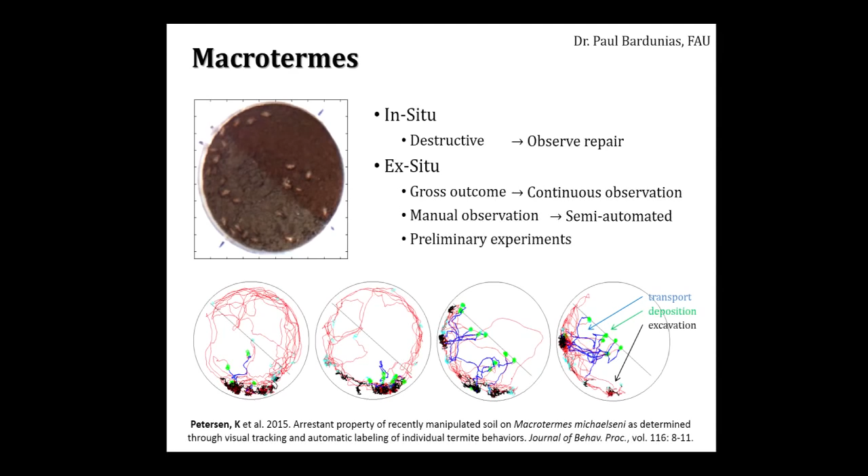So these results are not really robust on their own, but they certainly do merit future, more rigorous studies, and I'm very excited to continue this work in the future. All right, that's the work I did during my PhD.

So let me move on to the work I'm doing at the Max Planck Institute for Intelligent Systems in Germany. This may seem like a bit of a jump in context, but bear with me for a second.

What I did when I came to MPI was I sort of again took a step back and said, well, how can we design these robot collectives in ways that are much simpler, much more robust, much more scalable than we have been able to in the past? And I actually arrived at soft robot collectives for construction.

Soft robots typically are said to have the benefits of being able to traverse unstructured terrains. They can survive high-impact falls. They can squeeze through narrow gaps. They're resilient to a wide range of chemicals, including moisture. They have the ability to be made very simple and very inexpensive. And of course, they're compliant and safe around humans.

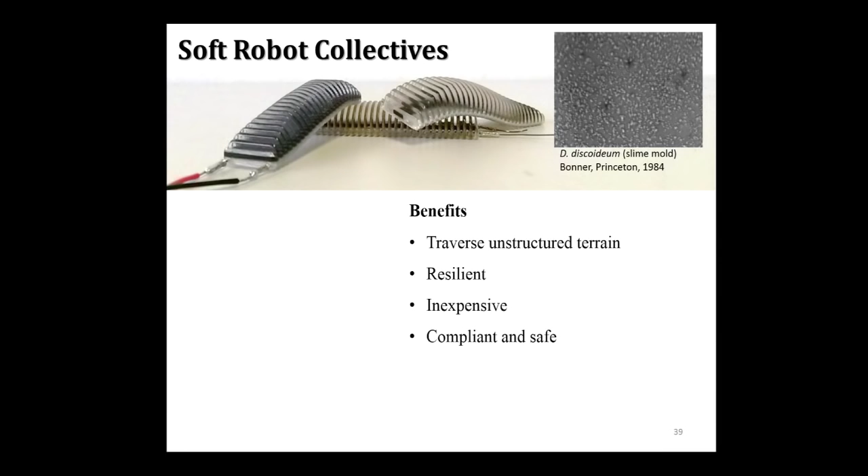There are examples in nature where you have soft cells merging to form solid structures out of their own bodies. Up here is an example of dictyostelium, which is slime mold, where you have these ground-living amoebas that, when starved, will aggregate to form a slug. Eventually, that slug will turn into a fruiting body made up of a stalk of dead cells and spores in the top.

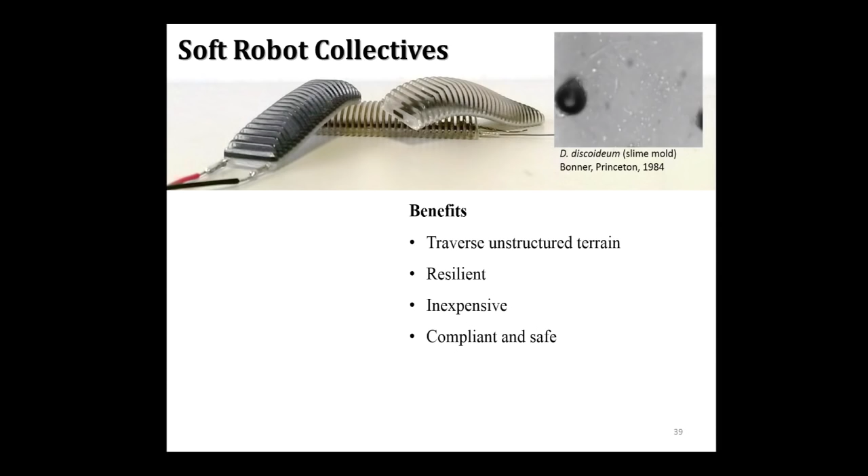Similarly, you may imagine having very simple soft robots performing chemotaxis and eventually forming solid structures out of their own bodies. And you may even imagine having them do rigidity changes to also make rigid structures, sort of like this conceptual image you see up here on the top.

So before I was working with robots that were rigid and able to manipulate material, and now I'm talking about robots that can actually build out of their own bodies. I'm not saying this will be an easy goal, it's a long-ranging goal, but I think the outcome might be accordingly great.

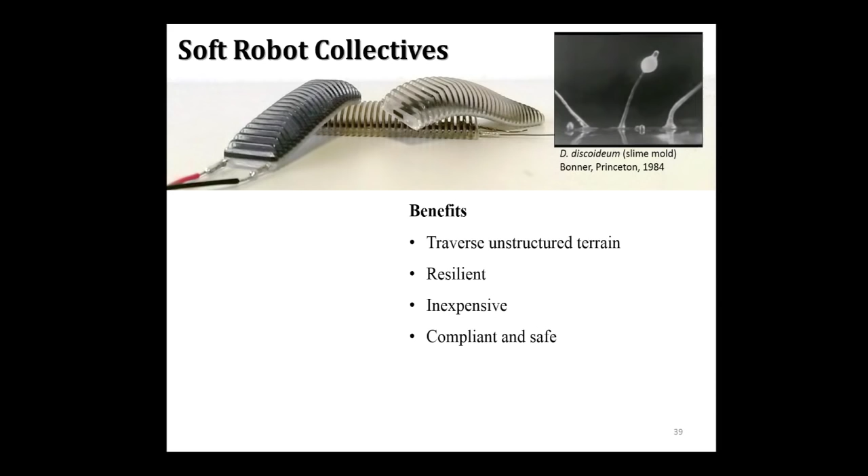I don't have time to cover all of the related work, but suffice it to say that although there's been recent great advances in both locomotion and manipulation, there's still a lot of challenges to be overcome in soft robots, from actuation, sensing material, and control.

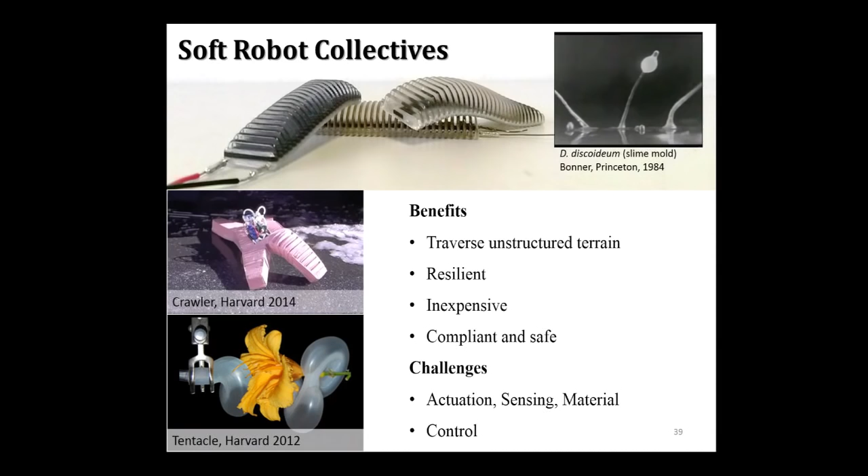They're not that exciting. But the work I'm doing in my postdoc, I'm focusing on actuation and trying to come up with a way in which we can actually enable these soft, small-scale, untethered robots as well.

This is work I'm doing together with Dr. Lindsey Hines at MPI. And if you look at this system, these are 3 soft membranes, all tied together by an internal air channel.

If I apply a very high voltage across one of the membranes, then I can create a very large controlled deformation without breaking the seal of the chamber, and so without these bulky compressors or pumps. So this here is a compact, low-complexity soft actuator with large, stable, and repeatable shape changes.

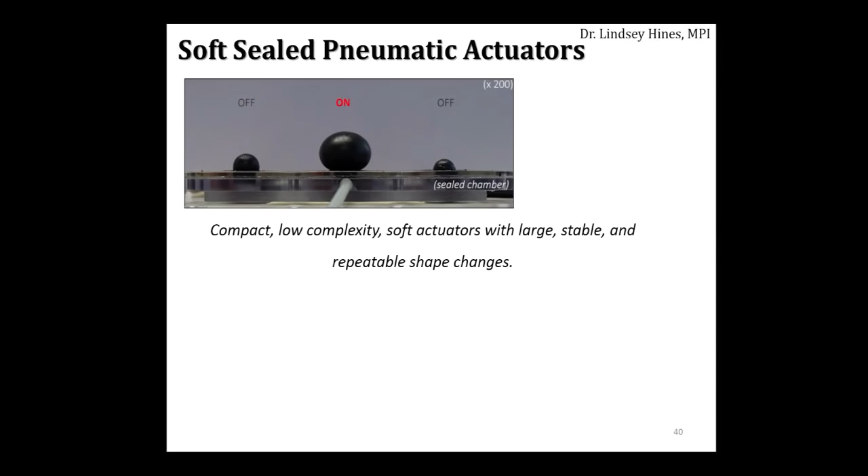This works by combining two concepts. The first is dielectric elastomer actuators. If you place compliant electrodes on either side of an elastomer and apply a very high voltage between them, 5,000 volts, the Coulomb force between them will effectively squeeze the material and stretch it out.

The second concept is hyperelastic materials with snap-through instabilities. The simplest example I could think of here was a latex balloon. If you look at this balloon animal, look at the tail. The pressure inside the tail is the same everywhere, but the tip of the tail is at very high strain while the rest of the tail is at very low strain.

So for one pressure, you achieve two drastically different volumes. And these are stable states. Unless I externally agitate the tip of the tail, it's going to stay inflated.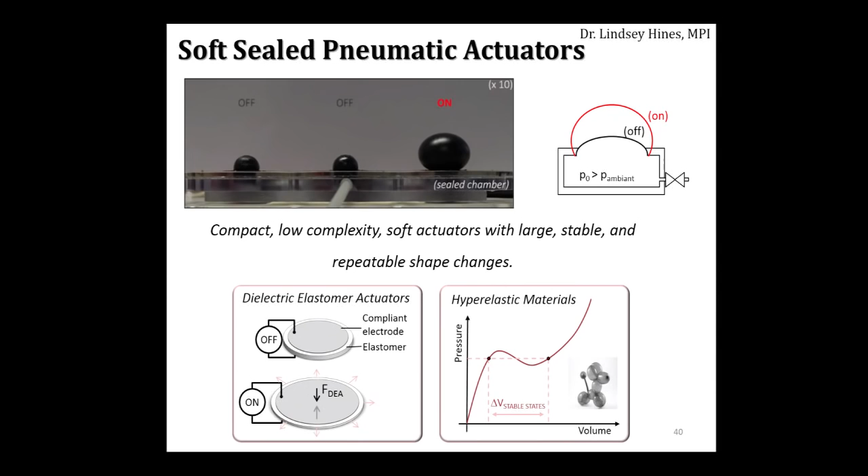Researchers have used this in the past, having an elastomer and then using the DEAs to push the elastomer past this cusp in the membrane to create very large deformations in sealed chambers. But none so far have shown the ability to reverse that deformation without breaking the seal of the chamber, so they're not very useful.

And that's exactly what we're doing here. We're fluidically coupling multiple chambers together in order to create these very large, repeatable deformations.

So we've looked at this both in practice and analytically. This here is a simulated example of a two-membrane actuator. This material's pressure-volume curve comes from an acrylic elastomer, VHB 4910, which is pretty popular for DEA applications.

The pressure inside the chamber is picked so that one membrane is past the snap-through instability while the other is just on the verge. Now if I activate one membrane, I'm artificially expanding the internal volume of the chamber, so the pressure will drop. I'll also obtain a new pressure-volume curve because I'm effectively thinning out the material.

Depending on the viscoelastic properties of this material, membrane one will slowly inflate past this new cusp in the membrane into the new pressure at a much higher volume, whereas membrane two will deflate to a much lower volume. Now if I turn off my actuator again, the system is going to revert to its initial pressure, but now at a new stable state where membrane one is bigger than membrane two.

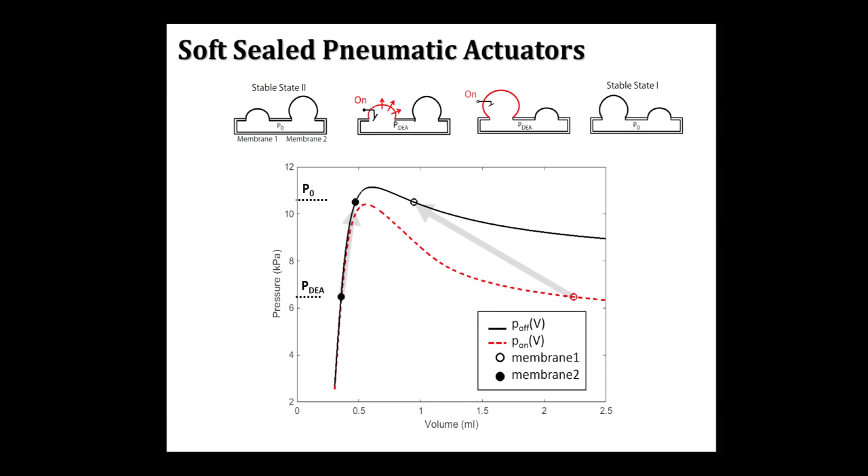So we can predict these stable states, using a method we've modified from Li et al. Basically, we look at the number of molecules in membrane one, because it's a sealed system, and we can use the ideal gas law to come up with pressure versus the number of molecules in that membrane.

We can look at the number of molecules in the rest of the system, again with respect to the number of molecules in membrane one — the total number minus the number in the rest of the system. This curve is slightly skewed because we're adding the air in the fixed chamber as well.

Now, we know the system is at the same pressure everywhere, so only the points where these two curves overlap is where the system is at equilibrium. By examining the area around those points, we can tell whether they're stable or unstable.

So the unstable point here is where the two membranes are at the same size, and either of the others is where one membrane is bigger than the other. We can do this also for when we activate the membrane, and our model accurately predicts that we have only one stable state in this case.

So we can do this for any number of stable states — we can add as many membranes to the system as we want.

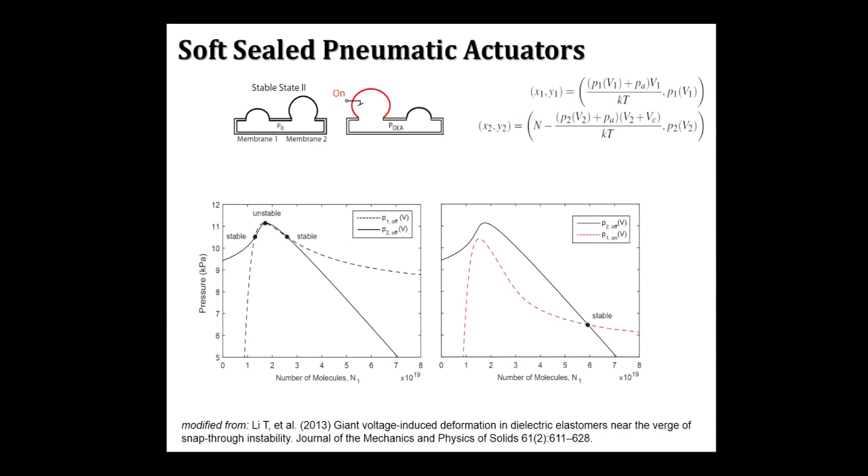We've looked at many different materials for this type of actuator, and what we're looking for is really a very low viscosity material, so something that has fast stretch recovery time for a very fast actuator. We're looking for a highly nonlinear material for very stable states, potentially with high volume differences. We're looking for a very soft material with a high dielectric constant, so you don't need a lot of voltage to perturb the material, and of course the higher the breakdown voltage, the more voltage you can apply without hurting the material.

We haven't found a single material that works well across all these areas. What we're using here is an acrylic elastomer, which is great in all these areas, but it has high viscosity, meaning it's very slow. Right now, state transitioning takes about 10 minutes.

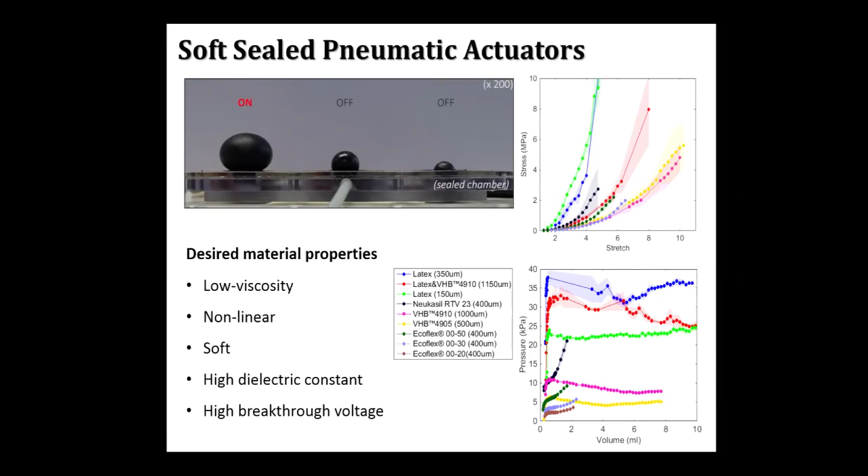If you're willing to trade off your high volume deformations for speed, you could use something like Ecoflex and get a system up to 1,000 times faster. This here is the experimental results from this video.

For example, to enter stable state 1, we activate membrane 1 with 3,500 volts, and the volume will slowly expand. At some point, when the other membranes are below the point of snap-through, we can turn off the system and achieve a stable state. If we want a new stable state, we activate membrane 2, wait till the other membranes are below the point of snap-through, and turn off the system.

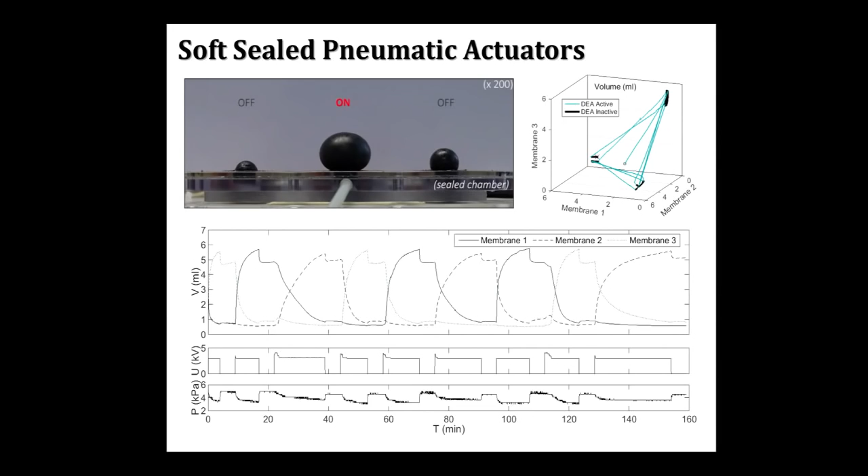These stable states show more than 400% volume difference, so quite big volume differences. If we compare those volume differences to each other, we see that in the stable states they're very repeatable and consistent. So we're very happy with this actuator.

Obviously there are some downsides. One is that it requires feedback — we need to keep one membrane activated until all the others have deflated below the point of snap-through. We're proposing a very simple system to do that: in this case, just measuring the capacitance of the deflating membranes.

Also, as with many soft systems, it has an inherently low force profile. But you can play around with the internal volume and pressure of the system a bit to increase this number.

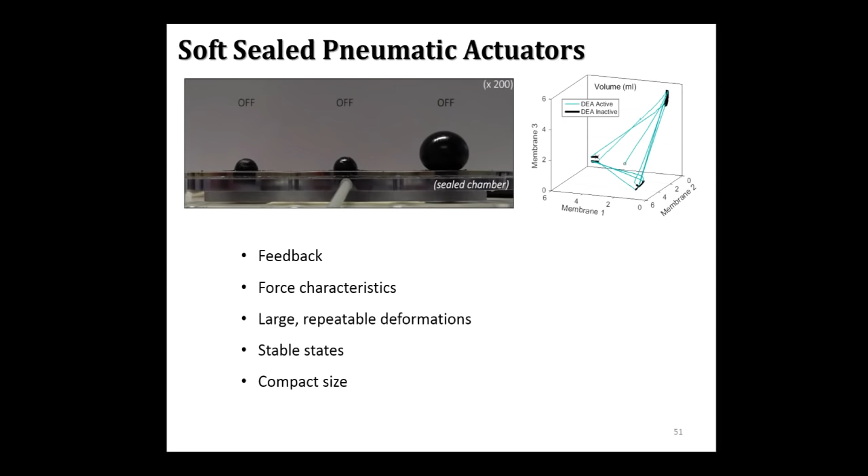On the bright side, we have large, repeatable deformations and a number of stable states depending on how many membranes you have in the system. It's compact size — yes, it's still tied to a high voltage DC-to-DC converter, but it's very low power. The converter we're using is just a cubic centimeter, very small, so we can drive it off batteries. And finally, it's very low complexity.

Here I'm showing you a rigid base, but you could imagine replacing that with a soft base in the future as well. Right now, we're using this actuator and incorporating it into soft robots, which hopefully will eventually turn into soft robot collectives that can build out of their own bodies.

Let me give you some concluding remarks, alluding to my future research vision. I showed you these robots in the beginning — robots for collective construction of user-specific three-dimensional structures. I think there's more we can learn from these robots.

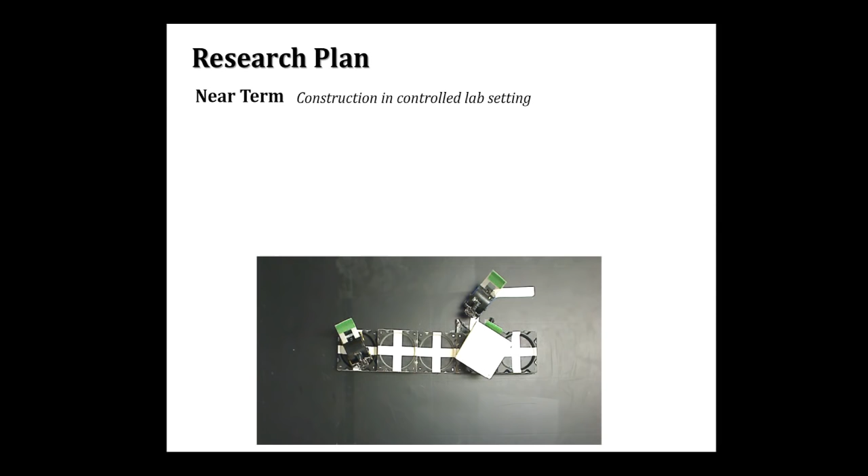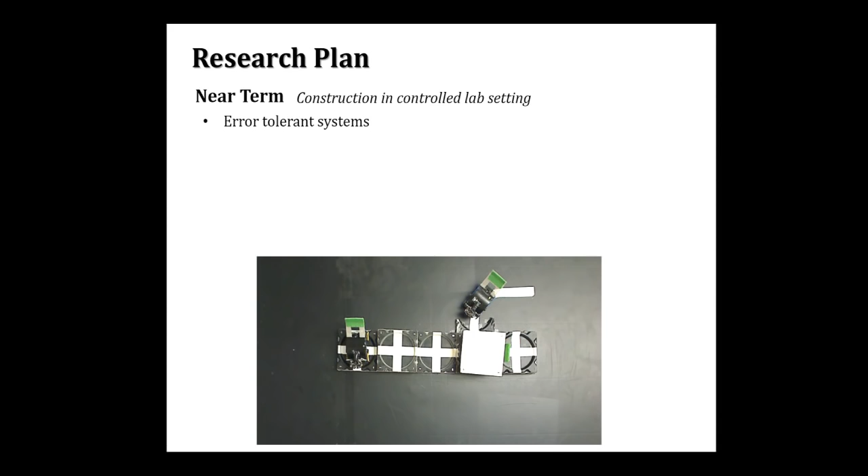If we extend the robots' capabilities to also remove material from the structure, we can use them as a platform to examine more error-tolerant algorithms — algorithms that can remove material or failed robots from the structure.

Algorithms that can add temporary material to fix mistakes — this is a long-term goal — but also algorithms that may be able to handle external perturbations. This won't be easy, but having reliable hardware to implement this on will be a big advantage.

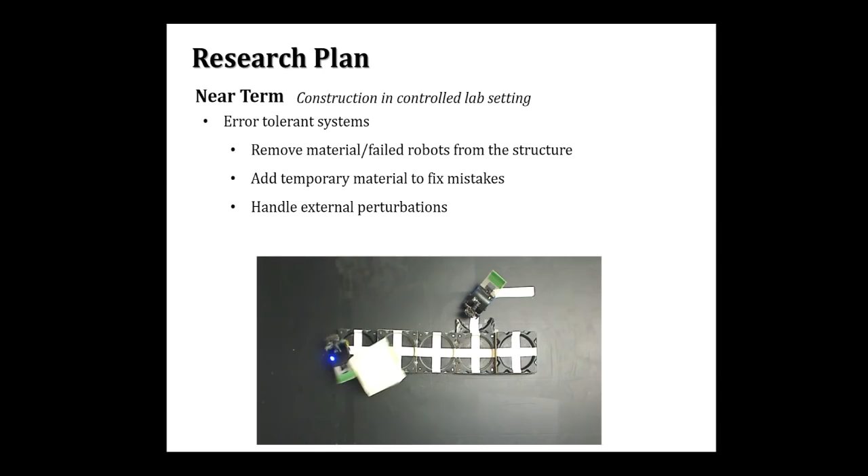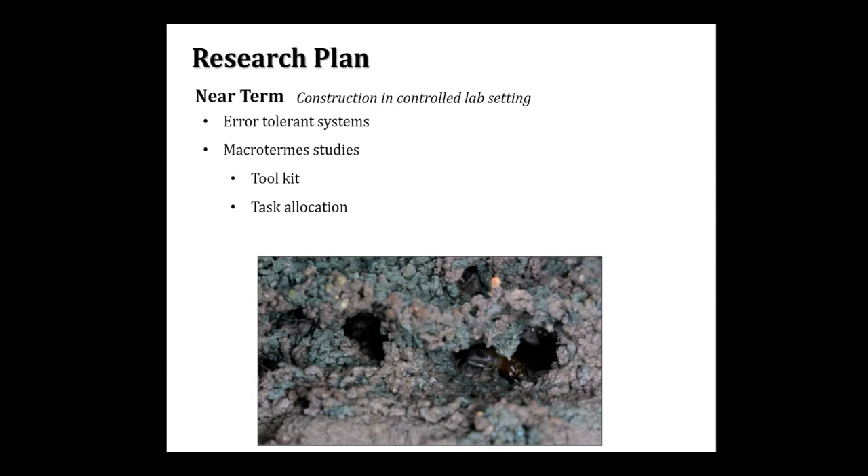Of course, I'm going to continue my work with the Macrotermes. As I said, we developed a great toolkit with which to study them. We found indications of task allocation, but I'm also interested in how they efficiently pass information through the environment and what other types of information they pass directly between each other.

The hope is that the knowledge we gain from these systems will feed back into our robotic systems as well. Long term, I'm interested in moving this work out of controlled laboratory settings and into construction in the real world.

I showed you my first research thrust towards that with these novel actuator methodologies that will enable soft robots that can build out of their own bodies. Beyond that, I'm interested in no longer creating structures according to specific shapes, but rather creating structures according to functionality. If you look to nature, you never see the same structure twice.

Animals build according to what the environment dictates. For us, it might mean building a structure of an approximate volume or shape, or maybe it means building a well-ventilated structure.

It doesn't really matter. The point is, if you're building according to structure functionality, you have a lot of leeway in how to accomplish that goal. So small-scale errors don't necessarily prevent the progress of the entire collective.

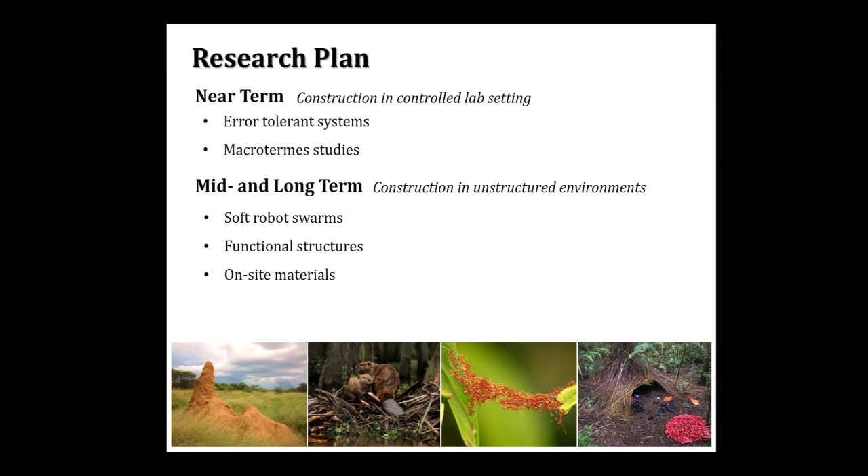I'm also interested, long-term, to start work with construction using materials found on-site. This adds challenges in both manipulation and navigation, but you no longer have to worry about bringing material to the construction site or cleaning it up afterwards. You can potentially include things already at the site, and even create continuous smooth structures. There are lots of applications, from construction in extraterrestrial areas where you physically cannot bring material along, to more pressing scenarios like construction of levees in flooded areas.

This is a topic that, at least in Europe, has gained a lot of recent interest. And then, of course, I'm interested in continuing my work with collectives in nature, developing toolkits, understanding what governs their systems, how do they coordinate in such a massively scalable way, and how do they handle both internal and external perturbations.

So that's sort of what I would like to leave you with today. I think I'm still on time. A wide range of topics, all tied together by this overarching goal of advancing our understanding of how to design and coordinate robot collectives, and correspondingly how social insects do so in nature.

And then just a final thank you slide to all the people at Harvard on the termites team, and of course my new group at Max Planck Institute. Thank you.

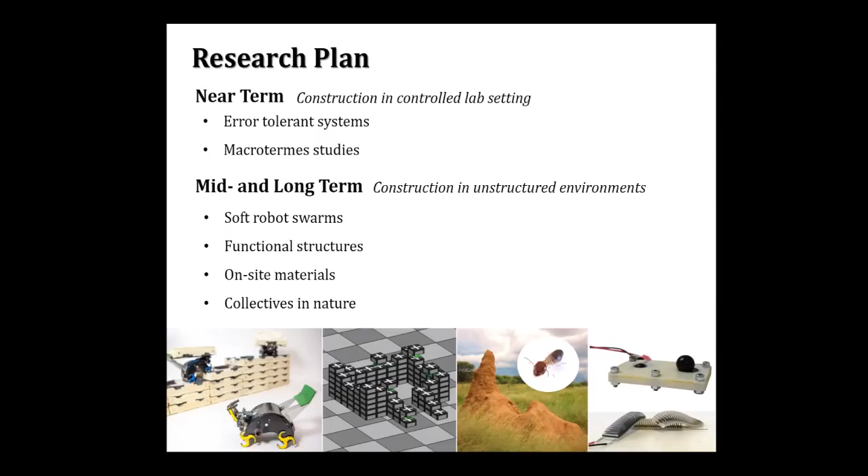And so you might think this is a very simple system that probably wouldn't have the ability to see that. That's not true, actually it does. Sometimes I add a little sensor here on the front, which just detects if there's a structure there. You could even do it with the ultrasound. And so a structure which is taller than one brick tall shouldn't be there, right? There should always be a staircase. So that would be one way to see that something is wrong.

More? If you had the time to build more of the small construction robots, where would you feel like your current systems would start maybe breaking down, or where you just couldn't construct, or they would be mostly in their way and things like that? Yeah, so how would I extend this hardware, and at what point would the current concept start to break down? I think I understood it right, yep.

Well, so right now, no overhangs, very, very simple structures, which I would definitely like to change in the future. I think the current robots are great because they show us that we can achieve a wide range of structures where they're simpler robots, and they've sort of allowed us new key insights into robot collectives. That being said, these are not very interesting structures. The ones I want to focus on in the future are functional structures, and so that's a very different set of hardware.

It's the same approach. You still optimize the hardware specifically for the task at hand, but suddenly robots are manipulating material that was very different from this predefined material. I don't know if that answers your question.

There's a lot of interest now in 3D printing and new ways to do manufacturing. If you had a lot of systems like this working really well, could you build 3D printers that could do things that can't be done today? Have you thought about what sorts of things those would be?